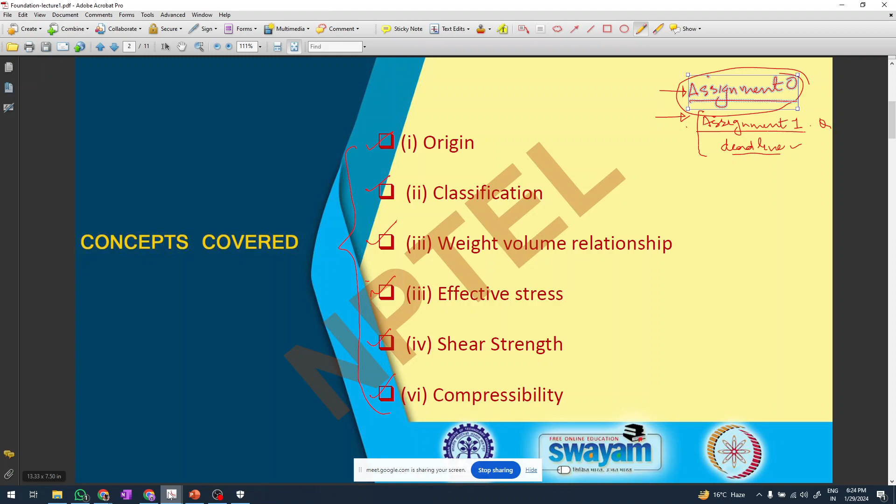Just a second. I was actually starting, one second. Okay. So in these sessions, I would like everybody to be as interactive as possible, because it will increase interest in the sessions and also make the sessions more fun.

So the first question, as you can see: the moist weight of 28.3 × 10^-4 m³ of soil is 54.27 N. If the moisture content is 12% and the specific gravity of the soil is 2.72, we have to find the dry unit weight of the soil and the void ratio of the soil sample. We have been asked to take the unit weight of water as 9.81 kN/m³.

So this is a very basic question from geomechanics or soil mechanics. Does anybody want to contribute on how we can do this question? Or you can solve it on your own and then discuss the solution with me. The participants are on mute. If you wish to speak, you can unmute yourself. I will wait for 1 minute, and if you have something to contribute, we can discuss.

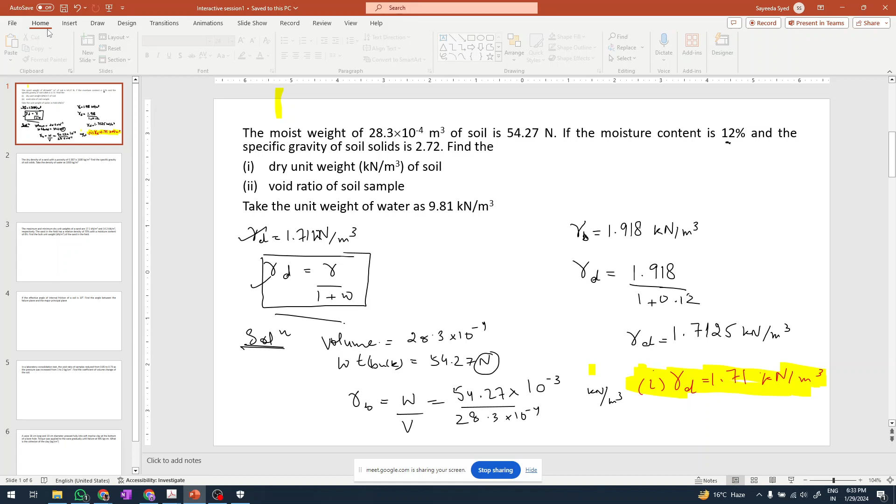Ma'am, Newton per meter cube. No, I have changed it to kilonewton here. One second. I introduced this. This was in Newton. I multiplied it by 10 to the power minus 3 here to change it into kilonewton. Yes? Yes, ma'am. Is that okay? Okay, ma'am. Into 10, 17.1.

54.27 divided by... it will be 20. Okay, I'm doing a mistake here. Thank you very much, ma'am, for pointing it out. This is 19.18 and this is 17.1 kilonewton per meter cube. Yes. So this is the general range of densities in kilonewton per meter cube. If it was in gram per cc, it would have been 1.92 gram per cc. So I did a mistake there. Thank you very much for pointing it out.

So let us move on to the second part of the question, void ratio. Have you calculated the void ratio? How do you think we should calculate the void ratio? Any suggestion? Any hint from the question? Where gamma is equal to gamma W into G plus E into SR by 1 plus E, where E into SR equals W into G. Yes. So then calculate, we get the answer. So there are two.

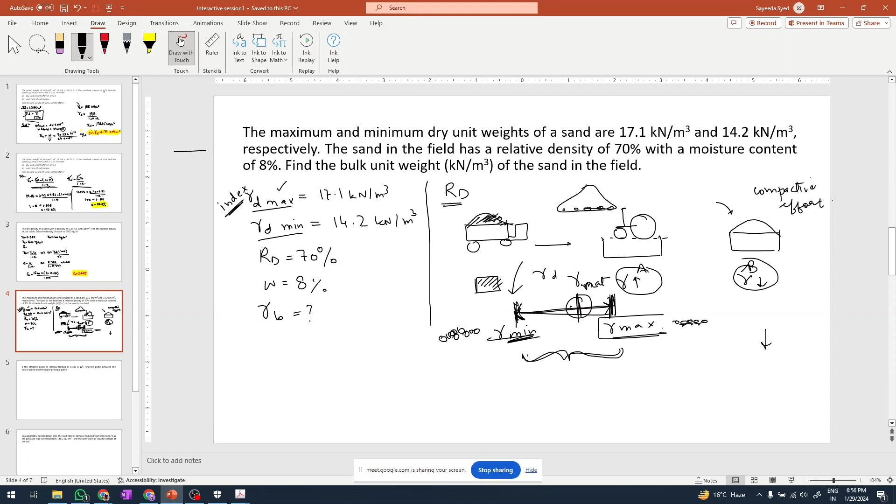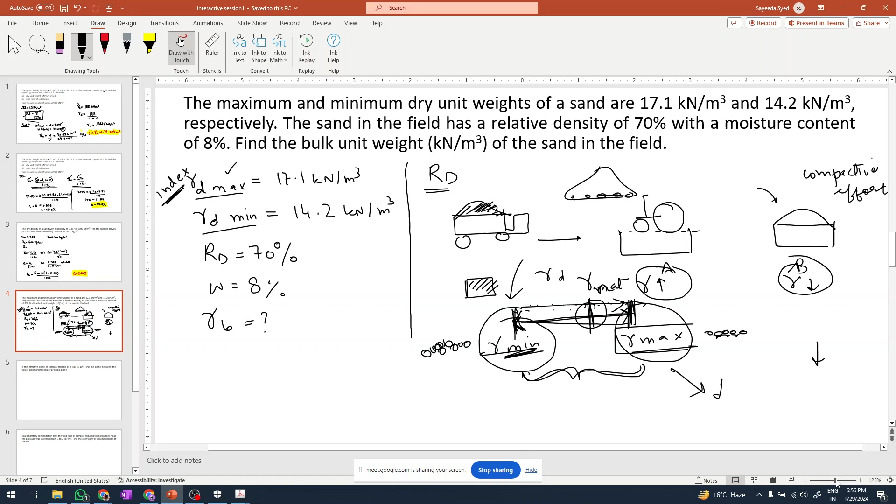in what state it is presently existing, because gamma natural can take infinite values, but gamma minimum will be constant and gamma maximum will be constant, and these are determined in a lab. Okay, so you take a sample, you take it to the lab, you perform a vibratory table test in which you calculate the gamma minimum and the gamma maximum.

So these are index properties, and then in the field when you encounter this soil, you perform a density test for its natural state. So you can compare it with the minimum it can go and the maximum it can go, and then you can say this is relatively 78% dense, 78% of the maximum density it can achieve, or 90% of the maximum density the soil can achieve. So this is what we mean by relative density. Okay.

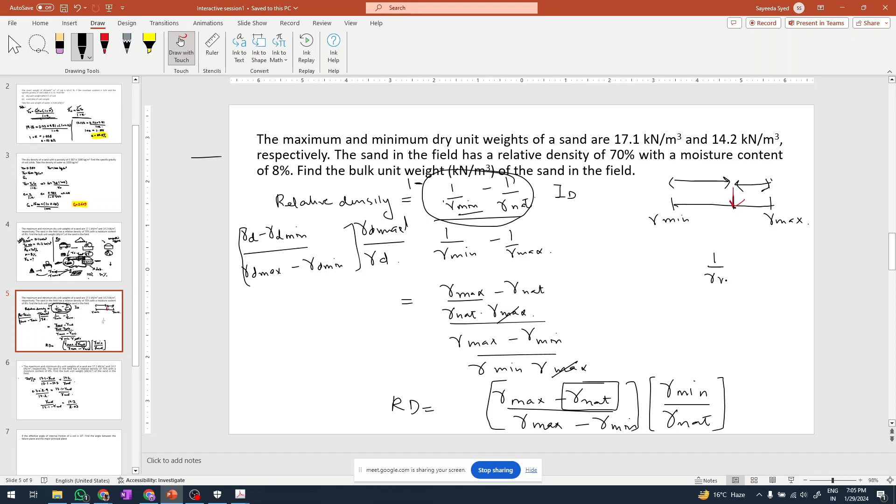Thank you, Vanita. Do you want me to do this again, or you have this formula? Okay, so this is our relative density. Anybody got the answer for gamma natural? Ma'am, 15.28. One second. It will be 16.11 actually. Let's calculate it together. Here I will write gamma natural minus 14.2, and here 17.1. So 17.1 minus 14.2 is 2.9.

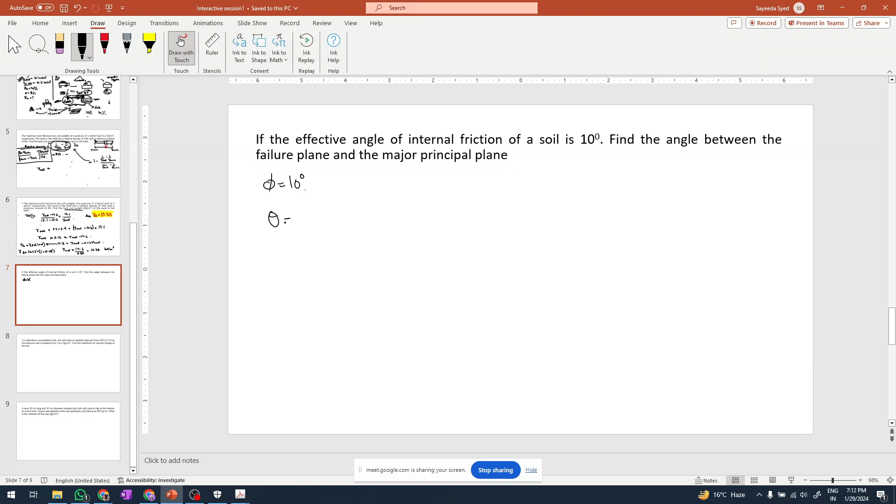Let's move on to the next question. This is a very straightforward question. If the effective angle of internal friction of a soil is 10 degrees, phi equals 10 degrees, find the angle between the failure plane and the major principal plane. Any suggestions on how we do this? 45 plus phi by 2. Yes, that is correct. So theta is 45 plus phi by 2.

Just to give a visual explanation: in geotechnical engineering, when we draw the Mohr diagram, we have the normal stress here, the shear stress here, sigma 3, and sigma 1, and we draw a circle. Where our envelope meets the circle tangentially is the failure point, and we join this. As you know, the tangent to a circle is always at 90 degrees to the radius. This angle will be 2 theta, and theta is the inclination of our failure plane.

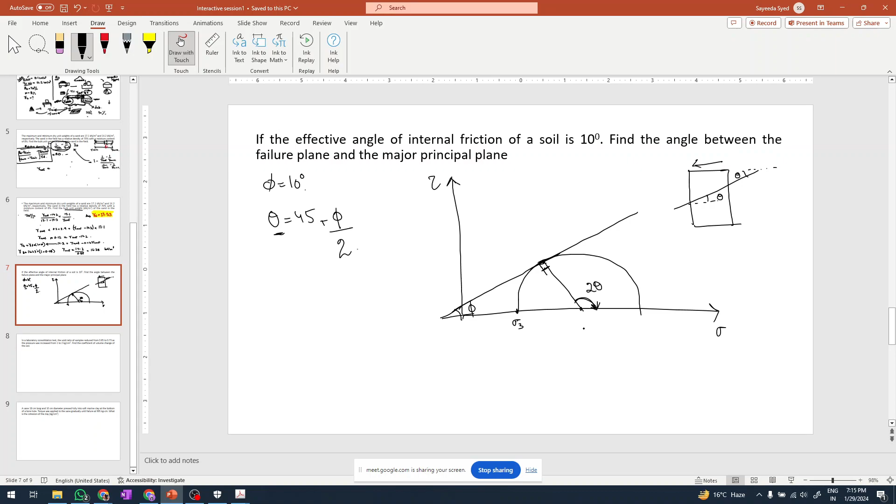Okay, so this is the angle that we are talking about. This we have to calculate, and in the Mohr circle diagram, this is equal to 2 theta, and as you know, this is our phi. And if we take this as an external angle, you know that an external angle is equivalent to, sorry, the sum of two opposite internal angles. So this will be equivalent to 90 plus phi.

2 theta equals 90 plus phi, and theta will be equivalent to 45 plus phi by 2. So here our theta will be equivalent to 45 plus 10 by 2, and theta will be 45 plus 5, which will be 50 degrees. So this is the answer to the question. Okay, everybody got it? Everybody got it? Yes, ma'am. Okay, if you have any doubt, you can always mention.

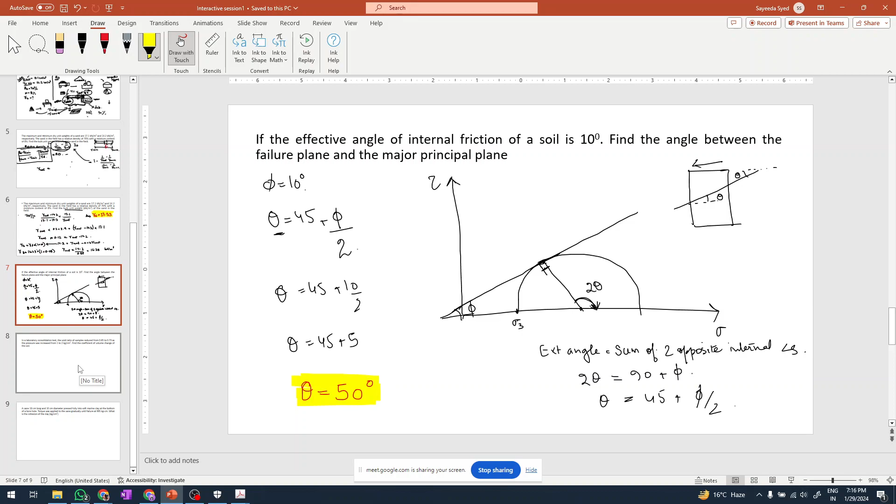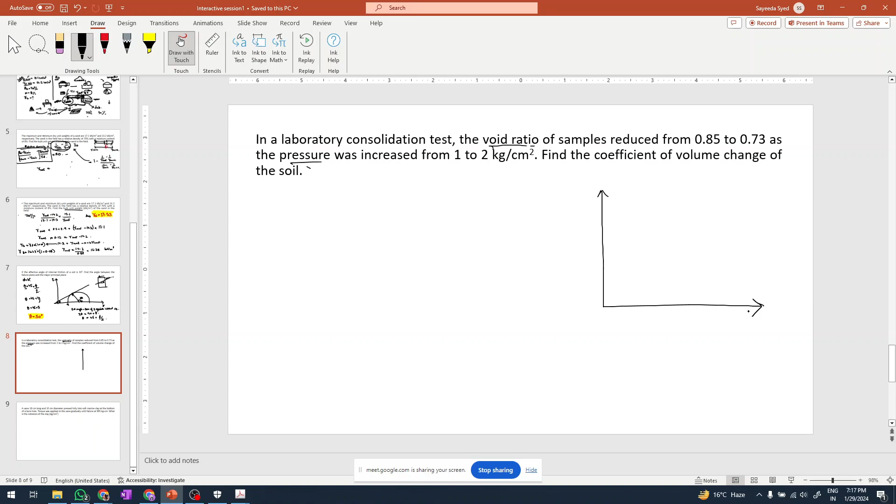Okay, let us do the next one. Shall we move on to the next question? Okay. So, in a laboratory consolidation test, the void ratio of the sample reduced from, so we have the void ratio and the pressure. Let me draw a graph. Okay, so the void ratio is here, pressure is here.

Void ratio reduced from 0.85 to 0.73 as the pressure increased from 1 to 2 kg per centimeter square. Okay, so we have to find the coefficient of volume change for the soil. Okay, so what will be the answer? What is the coefficient of volume change? Any answer?

Where mv is equal to delta e by 1 plus e naught into delta sigma effective. Delta, sorry, divided by delta sigma, I think. As far as I remember, it used to be divided by delta sigma, delta e by delta sigma. Is that it? Is this the correct formula? Yes, ma'am. Is this the correct formula?

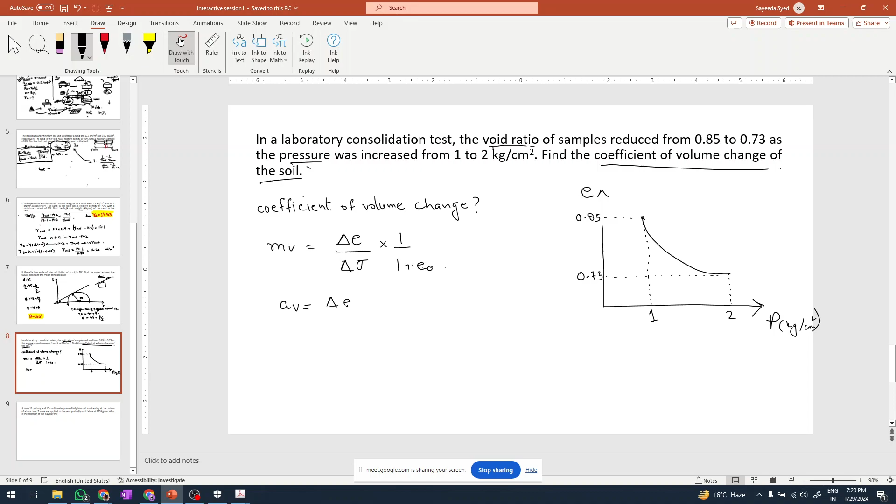1 plus e naught. Hmm. av used to be delta e over delta sigma, and mv used to be av over 1 plus e naught. Is it? Okay, so can we calculate this? Calculator. Delta e is 0.85 minus. Where is the calculator? Okay, so why don't you calculate it, Chandan?

Yes, ma'am. Yes, what will be the answer? Answer, ma'am. Just a... Yes, 0.06. 0.06. Yes, 0.065. Yes, that will be the answer. And what will be the units? Centimeter square per kg. Kg per centimeter square. Centimeter square per kg. Yes. Reverse. Centimeter square per kg. So this will be the answer to the question. Okay. So next question.

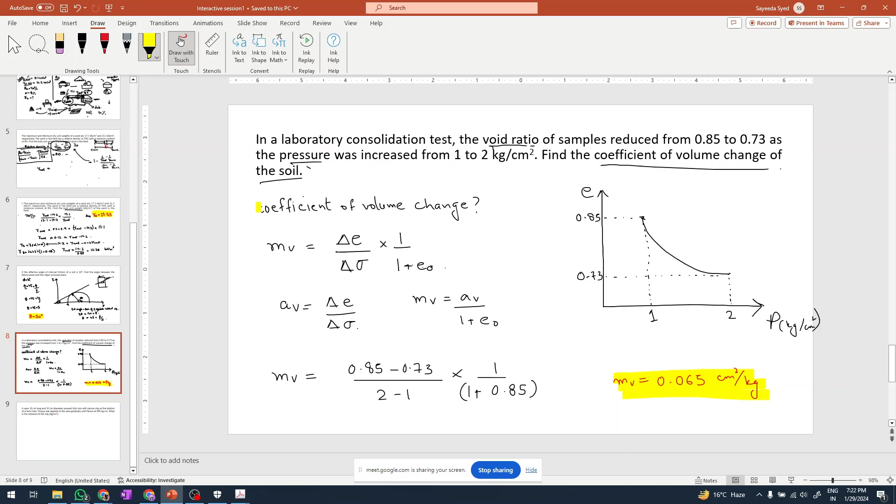Shall we move on to the next question? Shall we move on to the next question? Okay, ma'am. Okay. So this is about the vane shear test. So we have a vane which is 18 centimeter long and 10 centimeter in diameter. Pressed fully into soft marine clay. Why does it say pressed fully? Any idea?

Any idea? That is because the depth of penetration of the vane will determine if both of the edges of the vane are to be considered or not. Here, since the penetration is complete, both edges will be taken. If it was partially penetrated, the shear resistance of this edge would not have been taken into account in the calculation of the formula.

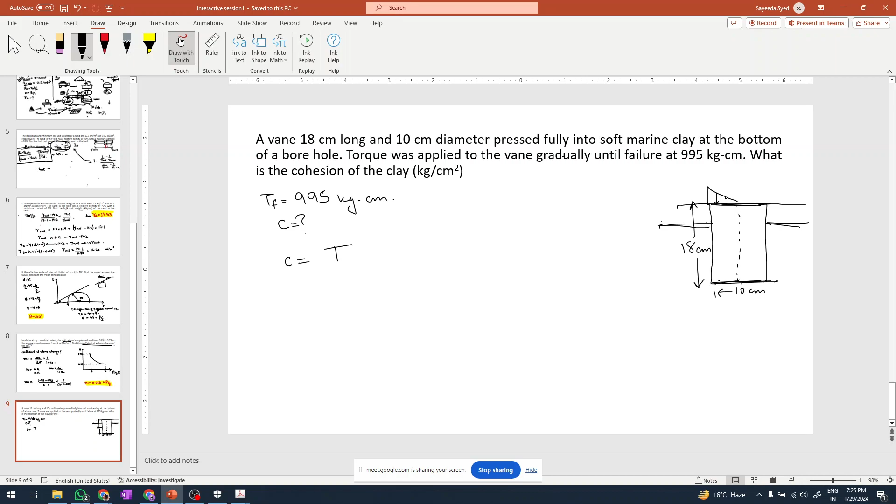The cohesion will be equivalent to torque divided by pi d square into h by 2 plus d by 6. This will be equivalent to 995 over pi 10 square into 18 by 2 plus 10 by 6. How much will this be? This will be equivalent to 0.297 kg per centimeter square. This will be the answer.

So these were the questions that I had planned for today. So does anybody have any questions about the questions that were discussed today? Let me recap. These are all basic soil mechanics problems. We did a question on the basic soil volume weight relationships. This again is volume weight relationships. This again is volume relationships.

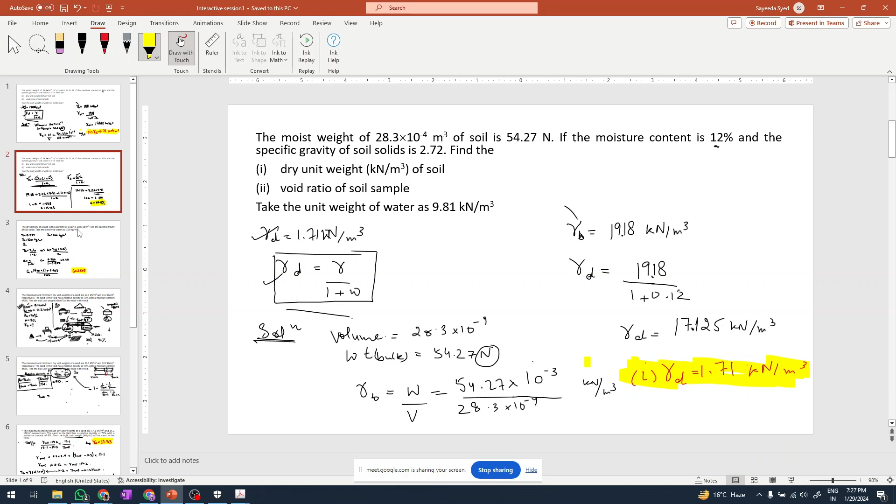Then this is on the relative density or the index properties. Then this is for the shear strength. This is from the shear strength part. This is from the soil compressibility part. This is from the shear strength part. So, any questions for the questions discussed today?